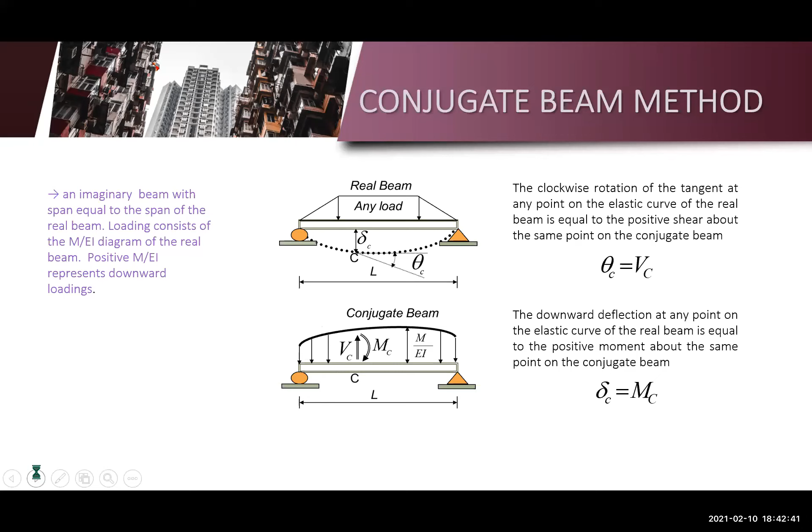Now, magbabago yung support kapag real beam tsaka conjugate beam. Ganito, example, sa real beam, simply supported. Kapag simply supported, ang support mo sa end is a fixed hinge and a roller, ang conjugate beam niya will remain the same. But if, kunyari, free end siya sa real beam, magiging fixed support siya sa conjugate. Kapag fixed support, magiging siyang free end. Ito, tulad nito, free end siya, naging fixed. Ito naman, roller, retain lang siya, naging roller.

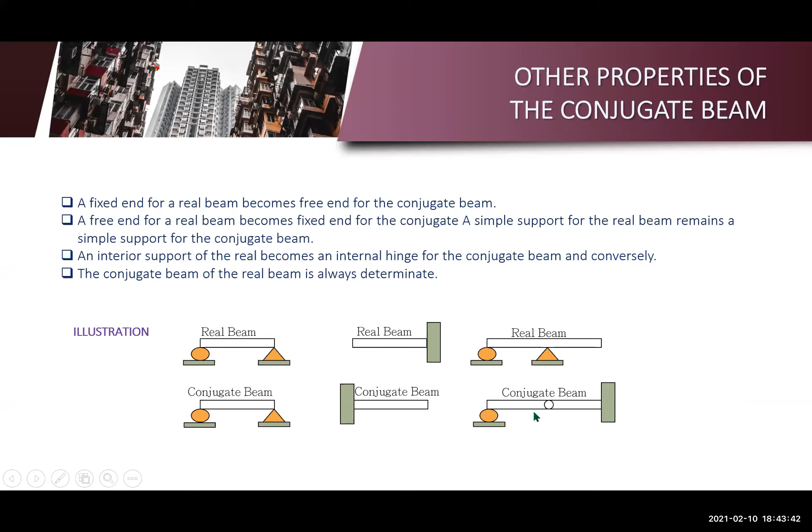Now, if we have an overhang beam or meron kayong support sa loob, magiging siyang internally hinged. So you need to familiarize yourself with this. Kapag free end, magiging fixed. Kapag fixed, magiging free end. Kapag internal, magiging internal hinge. So ganito lang yung pag-drawing ng conjugate tsaka real.

Okay, so try natin to, example. Okay, so dito kasi, if you notice, we have uniform load tsaka concentrated load.

So kapag ganito, just use your moment diagram by parts ulit instead of drawing the moment diagram ng beam, kasi complicated ulit yung pag-compute nyo ng moment shear. Check natin.

So kung eliminate natin yung support sa B, may matitira tayong tatlong forces: 100, 20, tsaka 60. So separate natin yung tatlo. 100 times 6 para dito. Tapos uniform load, WL squared over 2, ito siya. Tapos 60 times 4, ito siya. Now, ito yung moment diagram, no?

Hiniwalay lang natin, so this is your moment diagram. Now, yung moment diagram natin, siya yung magiging load ng conjugate beam. Since ang real beam natin is a simply supported beam, magiging simply supported beam lang din siya. And then, itong moment diagram, divide natin sa EI, constant naman, so no changes sa load.

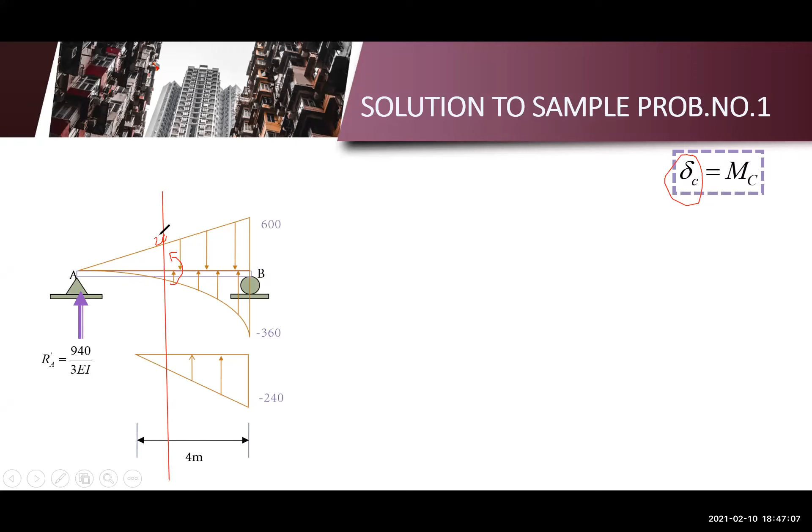So, to do that, kunin nyo yung height ng mga loads or pwede nating i-draw yung FBD. Ganito yung lalabas. Yan, point C. Ito yung FBD niya. And then, di ba, about any point on the beam, we have an internal shear and internal moment.

Now, the internal shear at point C is equal to the slope at C. The internal moment at C is equal to your deflection. So, deflection dito, moment C, di ba? Now, yung moment C natin, equal yan sa deflection sa C.

Now, how do we get your moment? Just do summation of moment at this point. So, summation of moment at C equal to 0. Then, isolve natin yung MC.

So, ito. Nag-moment tayo dito. So, we have these 3 uniform loads plus the RA, we will get your MC. Now, your MC is equal to your deflection at C, which is 1135 kilonewton cubic meter.

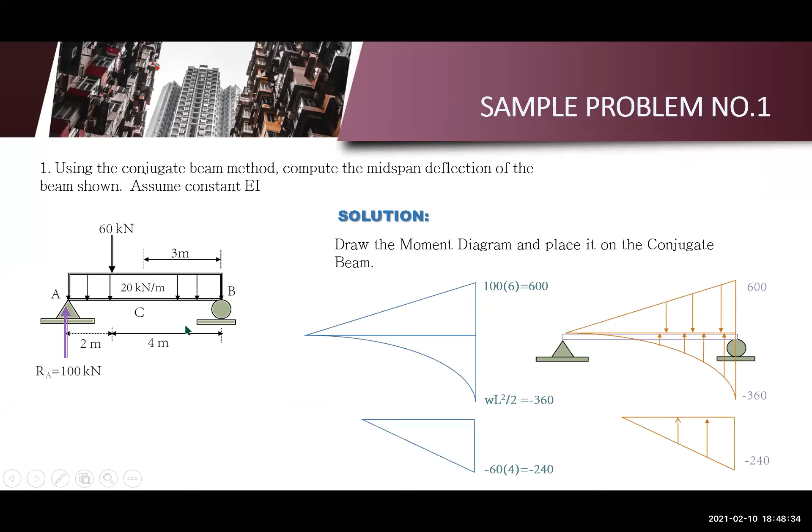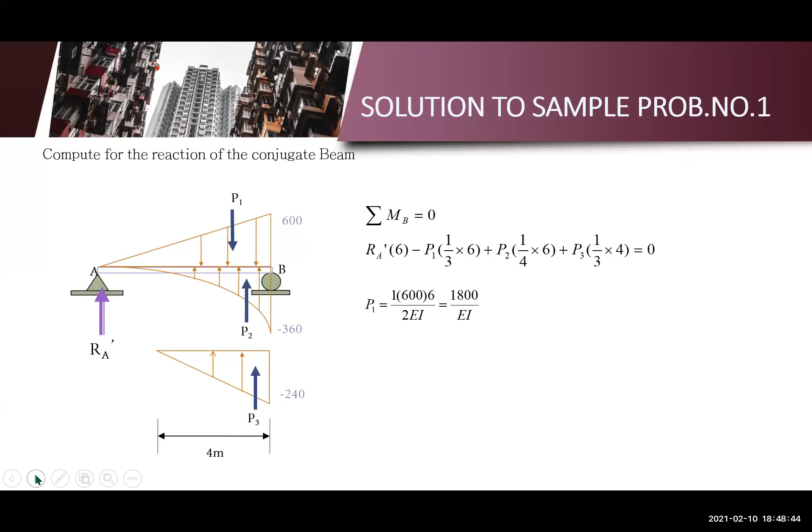Okay, ito ulit, medyo mahaba lang siya because we have so many loads. But this method is ideal kapag yung load niya or yung load sa beam is just, kunyari concentrated load lang. I mean, yung mga madadaling i-drawing yung moment diagram, this method is ideal para gawin yun. So, kasi masyadong maraming load. So, medyo mahaba yung ating mga solution.

Check natin yung second problem. Ito. So, determine the slope and deflection at point B of the steel beam shown. The reactions have been computed.

Ito na. So, dito, we have 2 options. Pwedeng moment diagram by parts. Pwede din naman na i-drawin nyo yung moment diagram niya mismo. Which is practically the same.

Diba? Kung drawing natin yung moment diagram, gawin natin yung moment diagram, shear diagram, tapos moment diagram. And hindi ko na to elaborate yung pag-draw ng moment diagram. This is not part of theory 2. So, yun. Dire-diretso na ako dito sa part na to.

So, we have 5. Tapos, 75. Times 5 times 15 sa ito. So, ang magiging moment diagram mo is ito. Ito yung moment diagram. Ang height nito is negative 75.

Now, divide natin ito ng EI, uniform naman. Magiging na siyang load ng conjugate beam. Now, kapag negative, tapos ang ginamit nyo is yung shear and moment diagram, ang load niyan is pababa.

Tapos, kung papansin nyo, this is the real beam, di ba? Kapag conjugate beam, yung fixed support, kanyari ito yung beam, yung fixed support magiging free end, yung free end magiging fixed. So, ito yung lalabas na conjugate beam. Tapos, ito yung magiging load niya.

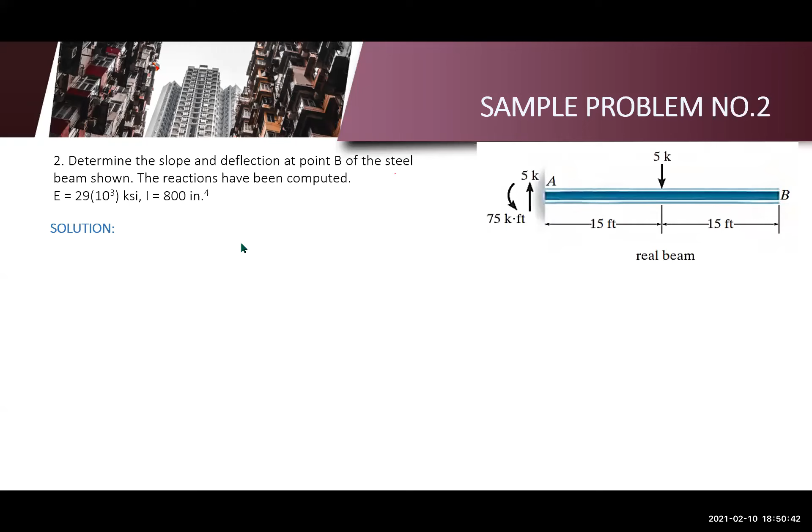Ayan. Ito, parehas lang yun ang drawing ko, no? This one, and kapag ang drawing is ganito, kunyari, ganito, no? Na pababa, parehas lang sila. Inakyat mo lang. Parehas lang. So, yun. Diba?

Nagpalit. Fixed support, magiging free. Free end, magiging fixed. Tapos, yung moment diagram natin na pababa, ganito, negative, magiging pababang load siya. So, yun. 75 over EI yung naging load sa conjugate beam.

Yun, theta B, yung rule, diba? I mean, yung concept is, yung slope equals sa shear, yung deflection equals sa moment. So, ang gagawin lang natin is, kukunin lang natin yung shear dito, VB, which is actually equal to your RB. Diba? Compute nyo lang yung reaction sa B, tapos compute nyo lang yung moment sa B.

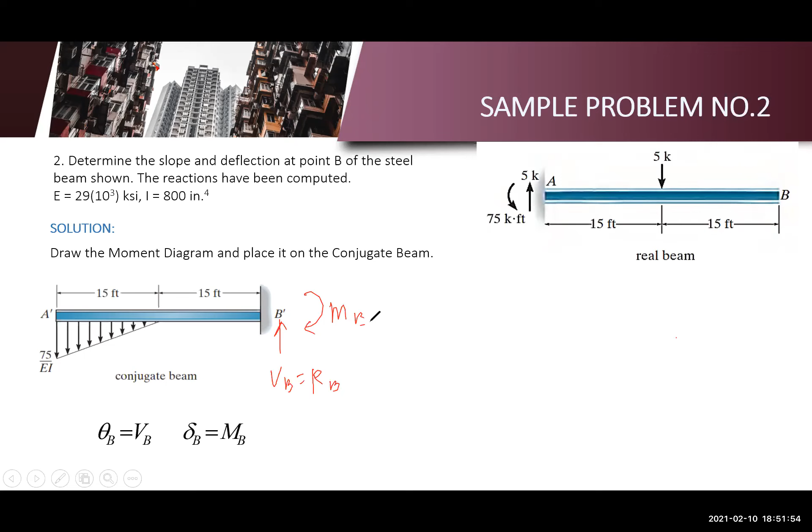Kasi yung moment sa B, equivalent siya sa deflection. Yung RB is equal to your theta B. So, all you need to do now is compute for the reaction at point B. Yun na mismo yung slope and deflection. So, yan.

So, ang VB natin is 562.5. Ang moment natin sa B is 14062.5. So, eto na. So, ganun lang yung pag-conjugate beam.

Since ang tanong, what is the slope and deflection at point B, ano daw yung slope and deflection dito? So, kunin mo lang yung shear dito, which is your reaction. Tapos, kunin mo yung moment dito, which will be your deflection. So, mag-summation of forces vertical to get the shear, summation of moment to get your moment B. So, ganun lang siya kapag conjugate beam.

Ito yung sinasabi kong example na medyo simple lang yung solution because simple lang din yung load. So, mas mabilis lang siya. What we did is we draw the moment diagram, place the moment diagram dun sa conjugate beam, and just compute for the kung ano man yung hinahanap.

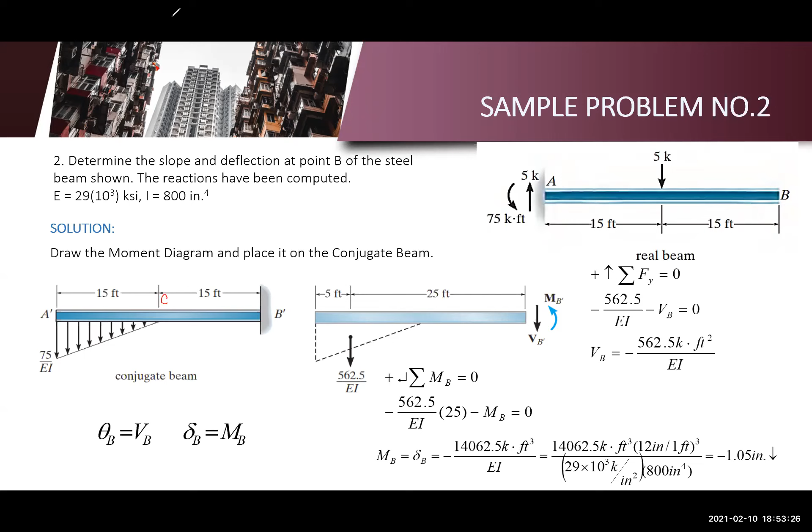Example, kunyari, determine the slope and deflection at point, sabihin natin dito, sabihin this is point C. What is the slope and deflection at that point? Ang gagawin nyo lang is, ikakat nyo lang siya sa portion na yan. Yan. Tapos, kunin mo yung shear.

Kunin mo yung shear sa VC, ito na yung theta C mo dyan. Tapos kunin mo naman yung moment C, ito na yung deflection mo sa C. So ganun lang siya kasimple.

Ang kagandahan din ng conjugate beam is once you have the conjugate beam, about any point ka mag-cut, kung saan yung hinahanap. Kunyari, what is the deflection at this point? Cut mo dyan, FBD, tapos pwede may shear and moment. Ito yung advantage ng conjugate beam. Kailangan nyo lang ma-draw properly yung conjugate beam with the proper loading.

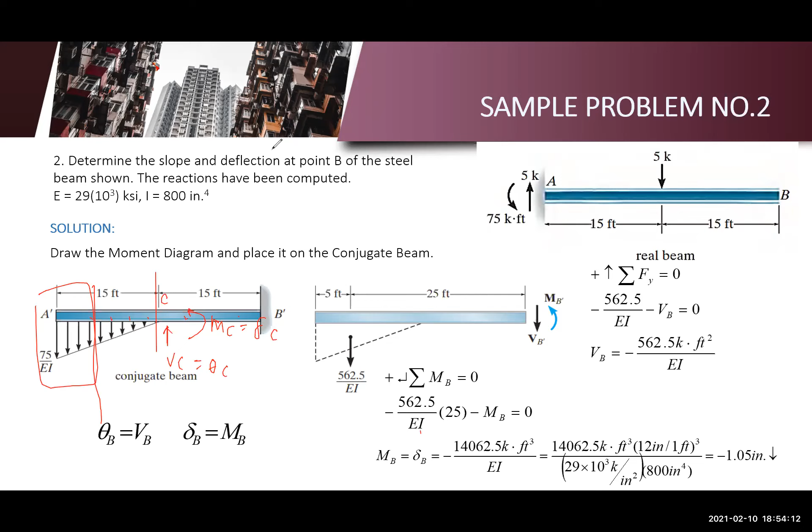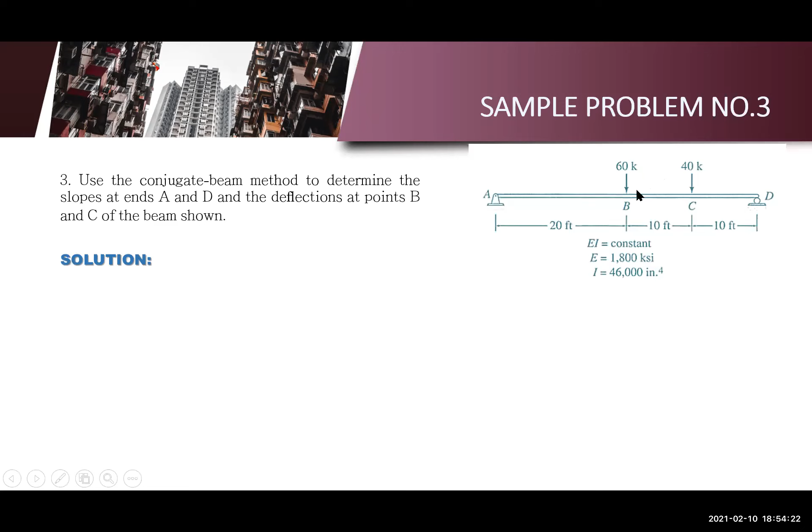Check natin, example pa. Ito, kung mapapansin nyo, concentrated load, no? So mas magandang i-drawing yung moment diagram. Kapag i-draw nyo yung moment diagram, ito yung lalabas. Hindi ko napapakita kung paano. So ito yung moment diagram. Tapos ilalagay natin siya sa conjugate beam.

Kung mapapansin nyo, simply supported beam naman siya. So ipi-place lang natin siya sa simply supported beam.

Ayan na. Ito yung tulad nung sabi ko, kapag positive siya sa moment diagram, kasi yung ginamit ko dito is moment diagram, hindi moment diagram by parts. Kapag positive, ang loading niyan is paakyat. Yung kanina, nasa baba siya, negative, kaya yung loading niya is pababa. If you are using the shear moment diagram to draw the M/EI diagram, positive upward yung arrow, kapag negative, downward. Okay, so hope that's clear.

Tapos kung mapapansin nyo, ang ginawa is nilagay lang siya dun sa beam, tapos magkukompute tayo ng panibagong reaction. Ito na yung loading ng bagong beam. So compute your reaction. How do you compute your reaction? You already know how to do that. Compute nyo yung AY tsaka DY. Ang tanong, ano ba yung tanong? Compute the slope at A and D and the deflection at points B and C.

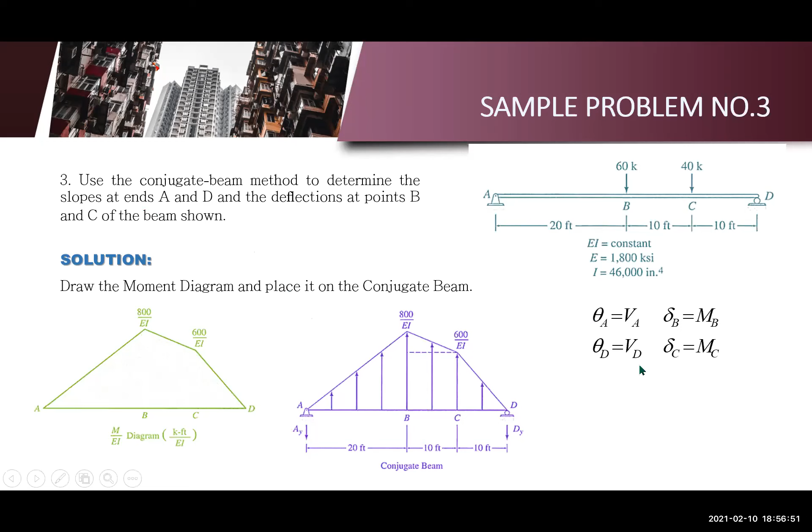So compute nyo yung reaction, summation of moments at forces vertical. Compute nyo muna yung reaction. Ito yung AY, tapos yun na nga, AY is equal to VA. Tapos theta A, convert natin. Ito naman yung DY. So after we compute the AY and DY, 8.5 tsaka 9.5. Balik na tayo dito.

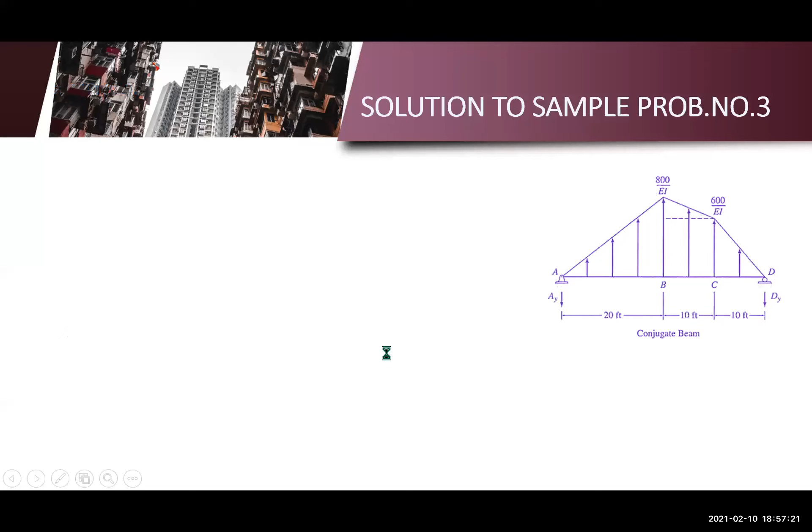Ang next naman, tinatanong is, what is the deflection at point B and C? Ang tanong is, ano daw yung deflection sa point B and C? Diba kapag deflection, moment, so ikat ulit, yung gagawin lang is ikakat nyo siya sa portion na to, cut nyo siya dyan. Tapos yung internal moment dito, moment B, yan na yung ating delta B. So much better na kapag ganito, mas magandang gamitin yung left side kasi mas simple.

Tapos yung isang tanong is, ano naman daw yung deflection sa C? Same lang yung gagawin, cut nyo siya sa C. Ganyan, tapos of course mas konti yung load sa right side. So ito na lang yung gamitin yung FBD, the right side. Kunin nyo dyan yung moment C. Yung pagkunang moment, same lang nung pagkukuha natin ng moment. So moment C is equivalent to your deflection at C. Kunin mo lang yung moment. Ganon yung gagawin natin for the deflection.

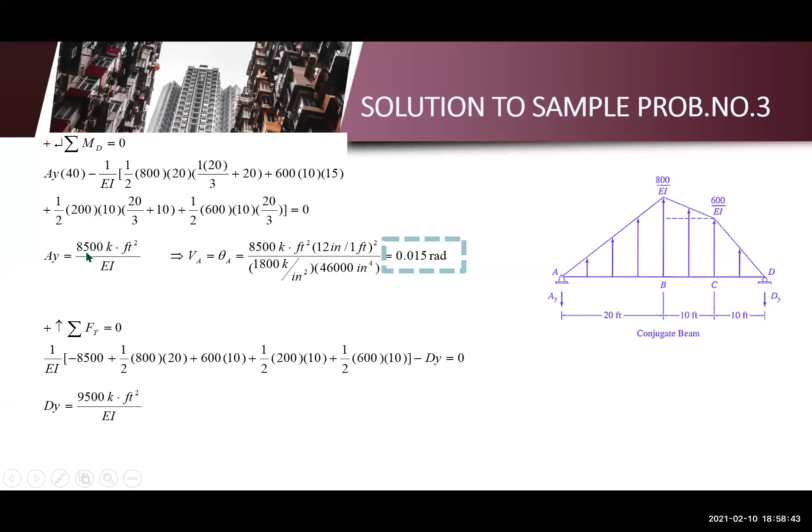Yung AY, lagay na lang natin yung given 8.5. Ang AY natin is, hindi ko nalagay, sorry. So this is 8.5, ayun 8.5. Tapos diba, summation of moment, tulad din nung ginagawa natin, pwedeng wag nyo nang ilagay yung moment B. Pwede na lang moment B is equal to yung opposite yung direction, positive. Since yung 8.5 same direction, so minus 8.5 times 20. Tapos ito, opposite yung direction, so plus 1/2 of the base 20, height 800, moment arm is 20/3. So yan.

Ito din naman siya, di ba? Sinimplify lang natin, so para saan yung pagkukuha ng moment? Now this moment is equal to your deflection at B. Ayan, kukuha natin yung deflection sa B. Kapag C naman, yung right side, ganito ulit. So compute naman natin yung moment C by same procedure. Ito 9.5 ata to, ayan. Tapos compute na lang ulit.

Compute for your moment C, which is equivalent to your deflection.

So kung papansin nyo, as long as you have drawn properly yung moment diagram, kasi dun talaga nakabase yung conjugate beam method. Kaya I suggest you practice drawing your moment diagram if nalilito pa kayo.

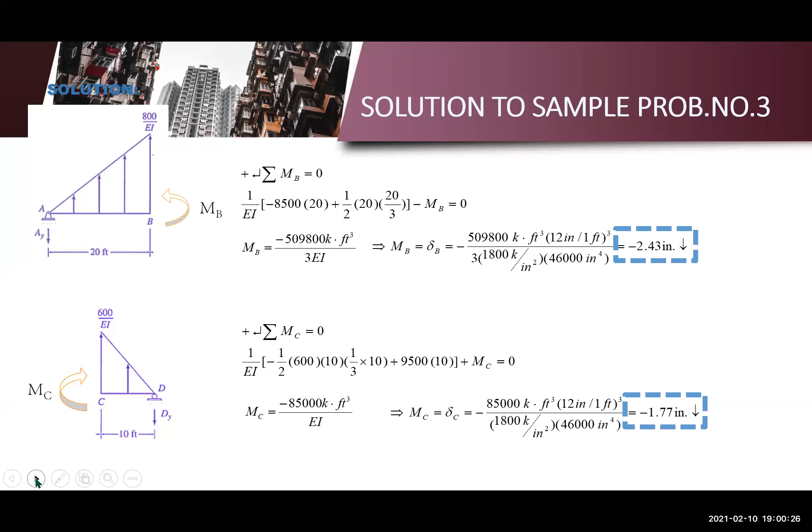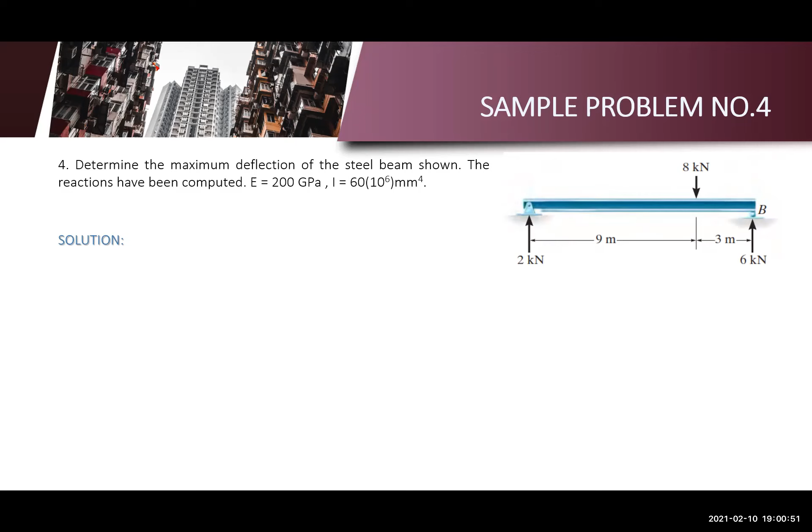So 2 times 9 is 18, minus 3 times 6 is 18, kaya siya naging 18. So yan, 18 siya na positive. Tapos, simply supported, so copy nyo lang. Tapos, this is positive, so magiging siyang upward force, kaya eto na siya.

Then I will not explain na to ha. So yun. Now since we know that at the point of maximum deflection, kunyari, ito yung maximum deflection.

At the point of maximum deflection, di ba, we know that the slope there, sabihin natin C, kunyari C siya. The slope at C is equal to 0 kasi nga straight line yan dyan kasi siya yung point of maximum deflection. So since we know that theta C is equal to 0, we can also say that ang ating VC is also equal to 0.

So we can cut here. Sabihin natin na dito yung C, no? Hindi natin alam yung location. And then we can say that the shear there, VC, is equal to 0. So ang gagawin lang natin, i-cut natin siya.

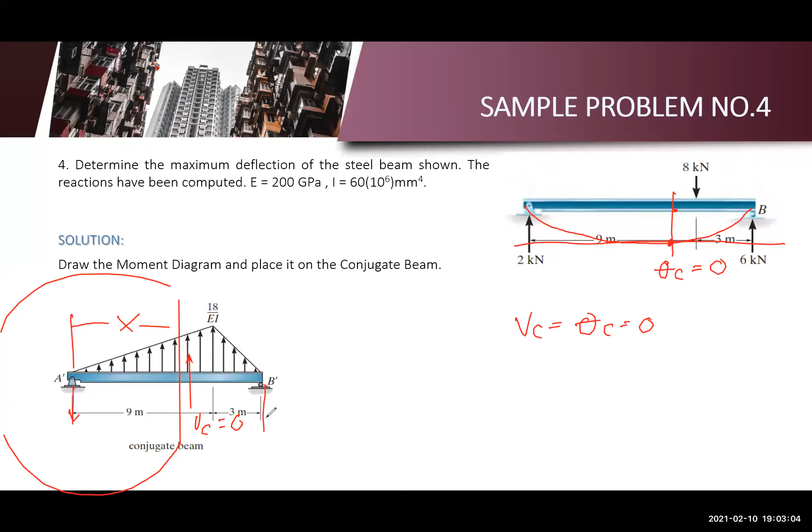So anong kulang? Compute nyo muna yung reaction, no? Compute nyo yung reaction. Now please double check yung loading natin is paakyat. So definitely yung support mo is pababa kasi may nakikita ko sa errors ng students is paakyat yan, yung reaction niya is paakyat pa din.

So lilipad na yung beam natin yan, diba? So we restrict movement. Since paakyat yung load, dapat pababa na yung reactions. Yan, always double check yung reactions, ha? Then compute niya yung reaction.

Pagka-compute niya ng reaction, ikakat na natin siya at distance X. So compute natin yung reaction. Ano yung lalabas na sagot? Yan, ito yung sagot. We have 45 and 63.

Now while reviewing this video, just try to recompute the reaction, because I will not be teaching how to compute for the reaction anymore. So yun, and then the maximum deflection of the real beam occurs at the point where the slope of the beam is 0 and thus the shear is 0. Ayan, ang shear natin dyan is 0.

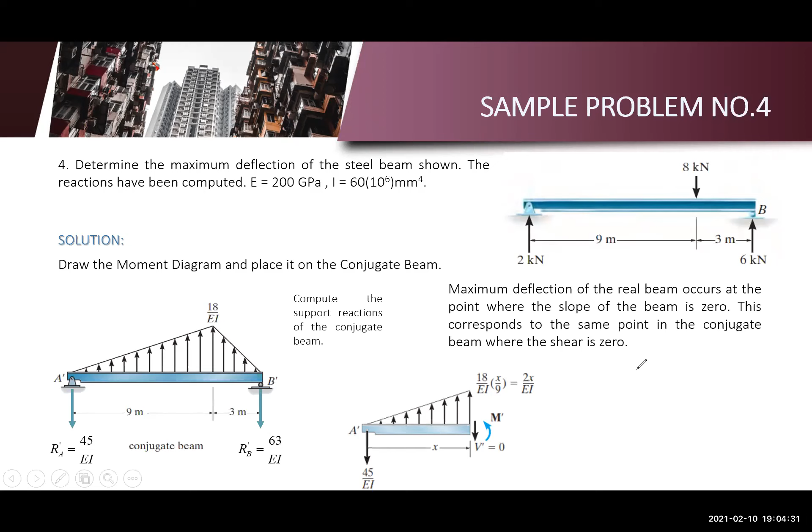Now for the height, if this is X, paano ba nakuha yung height? Ratio and proportion lang yan. Similar triangles ulit. Itong malaking triangle tapos small triangle. So kung titingnan natin, we have 18 over the distance 9, diba? 18 over 9, tapos itong triangle na to goes to Y over x.

So yung height natin is equal to 18 over 9 is 2, so 2x. So ito na yun, ito na yung height at this point, 2x. Similar triangles lang.

Now, how do we get the x? Since we have shear is equal to 0, pwede tayong mag-summation of forces vertical. Tingnan niya, summation of forces vertical equal to 0. We have 45 na pababa. Sabihin kong positive upward, 45 na pababa, so minus, plus 2x.

2x to, no? 2x, so 1/2, base x, height 2x. Then pababa yung v, so minus v equal to 0. Now since shear here is equal to 0, cancel na to. The only unknown left will be your x.

So thus we can compute for the value of your x. Compute natin yung x kasi siya lang yung unknown. Check natin. 0, so yun, your x is 6.71 meters.

Now the question is, what is the maximum deflection? Again, deflection at this point, sabihin na natin, ito na yung 6.71, no? The deflection is equal to your, ano nga? Deflection is equal to your moment. So all we need to do is get this moment because this moment is equivalent to your deflection. Yung moment dun sa point na to is equal to your maximum deflection.

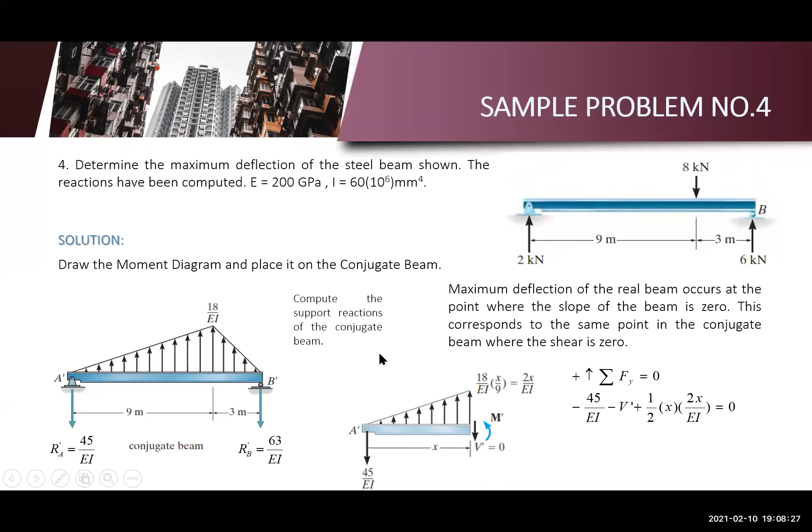Okay, so that is how you get the maximum deflection in this case. Here we assumed that the maximum deflection is on the left side, because if you look at how it would deflect given this shape, obviously the maximum deflection would be around this part. That's why we used this FBD.

Now, this is how it works when the beam is non-prismatic, or has varying cross-sections, meaning varying I. When you see values like 450, 900, 450, it's easier to work in terms of I. When solving, convert and use these values later. Much better to do it this way. This is just I, this is 2I, and this is I. So the first step again is to draw the moment diagram.

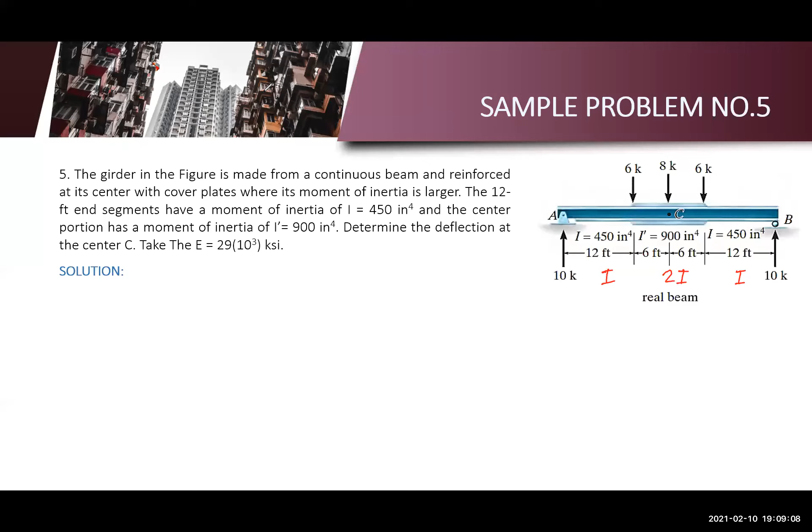Is the moment diagram here? Did I draw it? There's the moment diagram when we draw it. And then, as I said, this moment diagram will be divided by EI. So I at the center is 2I, so this will become 120 over EI.

This 120 over EI, at the center, let me change the color. At this point, because the 2I is from this point to this point, so from here to here, 120 divided by 2 will become 60 over EI, since I divided it by 2EI. This, 144 over 2EI, will become... just divide it by 2, then 2 again. So the shape will become like this.

So that's the resulting shape of our beam. That's what you always do when there's a non-prismatic section. Since this is just the moment diagram, it should become moment over EI before it becomes a load. This is where you apply the changes, the difference in the beam's cross-section. Let's check. There, so it becomes like this.

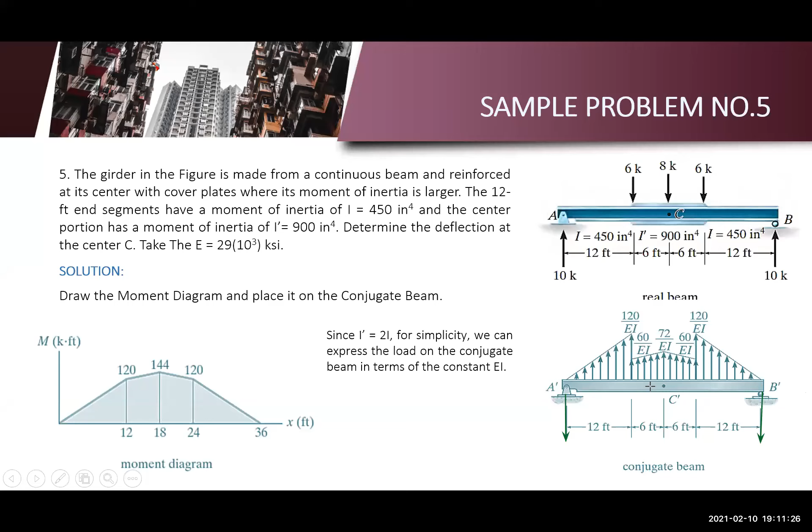Let's check. There it is, so this is the reaction. We converted it first into concentrated load to make it easier. Add the 4 divided by 2. This is the external reaction. Now since the question is about the center, we again cut it at the center. Then we get the moment, moment C, sorry, moment C.

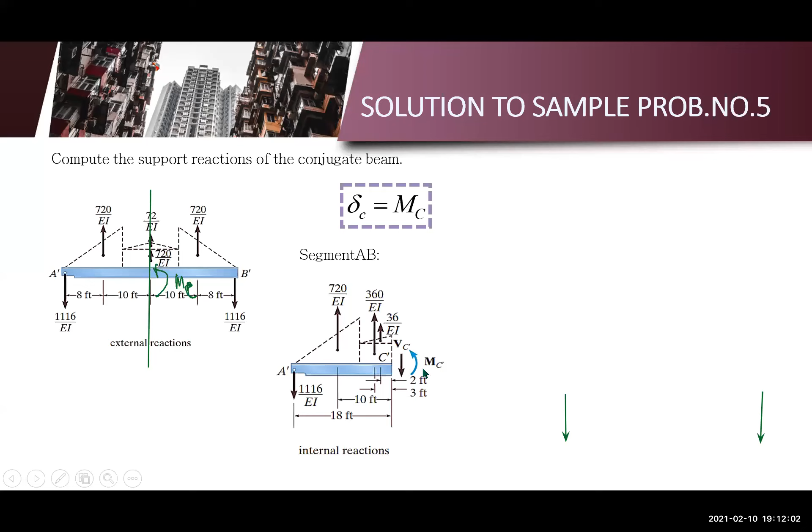So let's get the moment at C. To avoid confusion, convert first into concentrated load, then get the moment arm to get your C. There, so your MC is equal to your deflection C, which is equal to 1.55.

So that will be the last example. Now let me reiterate, for the conjugate beam and area moment method, one of the similarities is they both rely on your moment diagram. So I suggest that if you have multiple loadings with a uniform load in it, it's better to use moment diagram by parts. But if you just have a simple load, it is better to just draw the shear and moment diagram, then start from there.

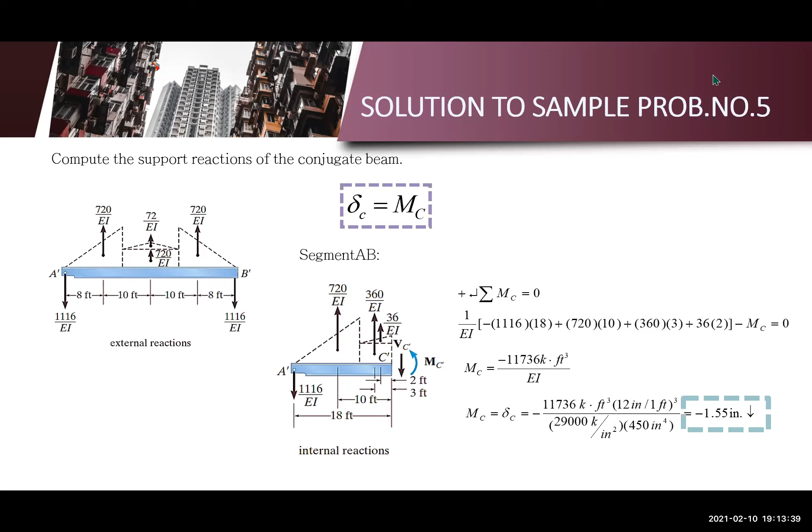Okay, so that's it. And then always, when it's non-prismatic, divide the I into the moment diagram before analyzing the beam. And then please practice drawing your shear and moment diagram because that is very relevant, not just here but also in design subjects. So you can't escape it, you need to master that. And then all of these are just your area and centroid. Okay, so that would be all for the conjugate beam.